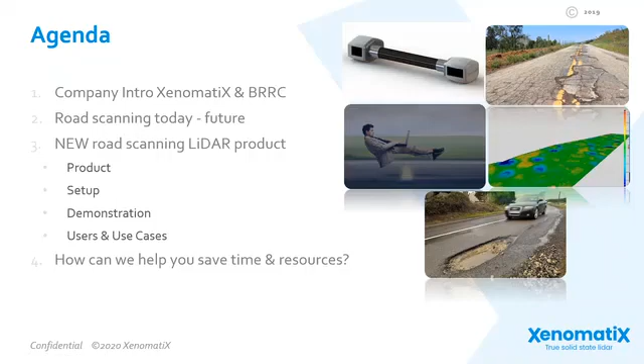On the agenda for today, we start with a short company presentation, so you know who we are. Then Tim will present a summary of the road quality measures and means that you probably all know, and he will make the link to the vision towards the future, the near future, I would say. After that, I will present the new road scanning LiDAR. I'll talk about the products. We'll set it up on a vehicle, and then all together we get in the car and we go for rides. After the demonstration, I will shortly discuss a few other cases that might interest you. And we will end with the summary, how we can help you save time and resources, because that is the final purpose. Okay, company introduction.

Start with XenomatiX. XenomatiX is a company focusing on the development and commercialization of LiDAR sensors. And LiDAR, for those who do not know, LiDAR stands for light detection and ranging, so measuring the geometry of the environment by sending out invisible light and capturing the reflected photons, the reflected light.

XenomatiX was founded in 2013, so kind of a startup scale-up, based on the invention of a professor from the University of Antwerp. He had a great idea on how to solve the requests from the automotive market.

Let me explain. When we look on this time scale, everybody remembers the outcome of the Google car with the spinning LiDAR as a mushroom on the roof. That mushroom, as I call it, contained cameras and LiDARs to measure the full environment around the Google car. And everybody was excited, not in the least the automotive industry. Then it got their attention.

LiDAR technology was known, but the usage of LiDAR technology gave a perspective to them to realize safe and reliable autonomous driving. But to make this happen, the car industry asked to make that mushroom, that big thing on the roof, more robust and reliable. And they asked for what they call a so-called solid state solution, meaning no moving parts, robust for the car.

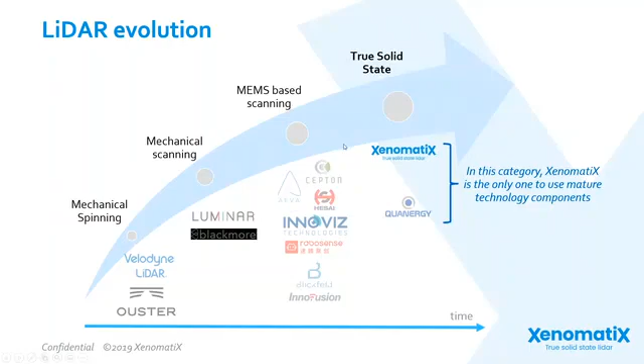Our headquarters is located in Belgium. We have offices in Germany, in the US, in Detroit, and in China. And we have also distributors. In the US, they're located in California, in Japan, and in South Korea.

Tim, can I ask you to shortly present the Belgian Road Research Center?

Thank you, Chris, for the introduction. Yes, of course. My name is Tim Massard. I'm a researcher at the Belgian Road Research Center. We are an impartial research center since 1952. We have different divisions, going from geotechnics to pavements and to road management. I am working in the division Road and Asset Management. Our key activities are research and development, technical assistance, and knowledge sharing, and this for all stakeholders in the road sector.

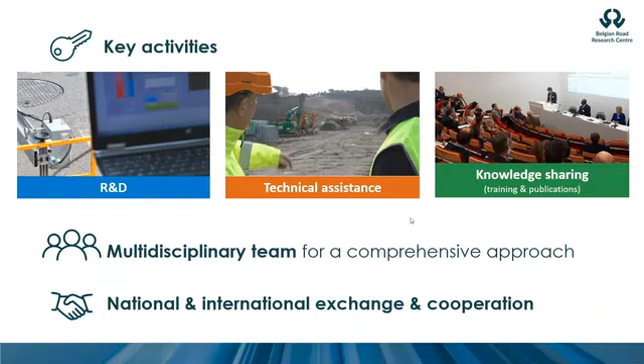Let me now summarize the measures and means for road scanning that we all know, and then pass the bridge to our vision for road scanning in the future.

We can observe different road network owners. One of them are national road authorities, also known as NRAs. These entities have a quite big road network to manage. Therefore, they are using different technologies to measure fast several technical parameters like longitudinal evenness.

For this parameter, different indicators are used. IRI is the best known, and software like ProVAL is broadly used. Other parameters are transversal evenness, crack detection, skid resistance, etc.

For this demo, we chose to drive around in Brussels because that's nearby where BRRC and we are located, and because we use these measurements for research we do together with the Belgian Road Research Center.

So here, okay, software ready to go. You remember the bands of lasers. We stand still, let me explain one more time. On the left side you see the laser bundles. As long as we stand still, it's always the same part of the road that is measured. It's only when we move that we construct the full road and fill the gaps.

Important to understand is the color code you see here. Green means it's the height value of a flat surface underneath the car. Blue means it's below that flat surface, so there's a pothole or a gap. Yellow and red means it's above, so a bump or speed breaker, with a different scale that we can change. This is the 3D data, and on the right you see the camera.

One more thing, in the software we can present the digital data in two directions. Here we'll start with showing it while the car is driving backwards, I would say. So with the camera image processing this way, the LiDAR or geometrical data will process in the same direction. During the demo I will make some cross sections, and that is always referred to the position of the driver, so I will turn this image around, but you will see, no worries.

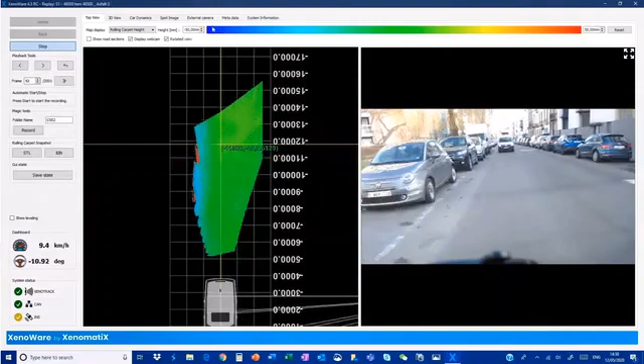So you have the bands, we have the camera image aligned, and we start driving. You see the different bands moving with the car, so we're constructing, the gaps are filled, and we're constructing the full digital roads. You see the different color codes already, you see the scale on top. There we go from asphalt to cobblestone, and already on the left side we have some elevation, kind of speed bump.

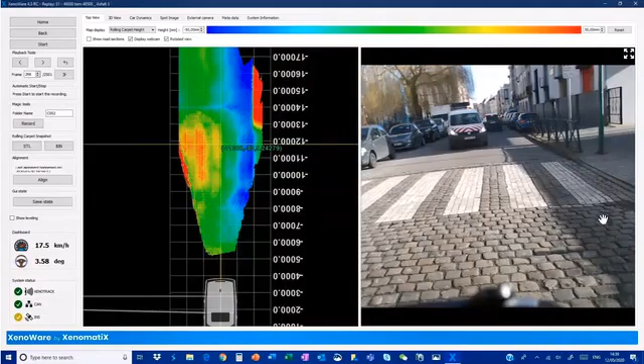And on the right side we have some subsidence, so there we have the blue color. Clearly there is some damage or modification on the road. Besides the geometry, we show the intensity here, and here the stripes are reflecting more than the cobblestone or asphalt. Just after the speed bump, there's again a subsidence.

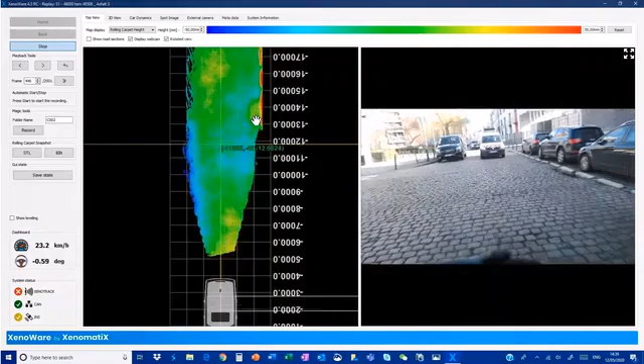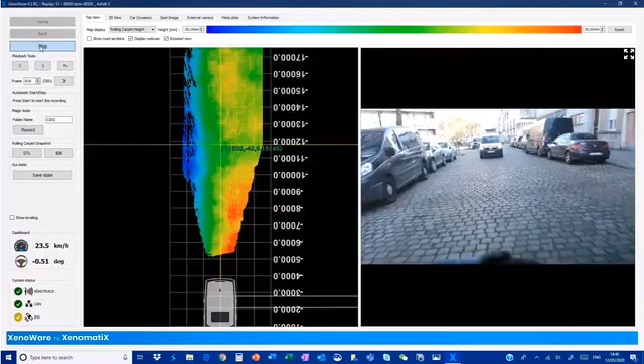We see detail, we see the blocks from the parking cars that separate the parking cars from the roads. We see blue, yellow, red, depending on the scale we use, but you see even the detail of the cobblestone itself, the shape or dimension of the cobblestone. That kind of detail we get with the LiDAR.

On the side you see the blue. Here, that's an interesting point, we have some manholes, and you see they don't fit completely with the road. The cobblestones around are a little higher on that side than this.

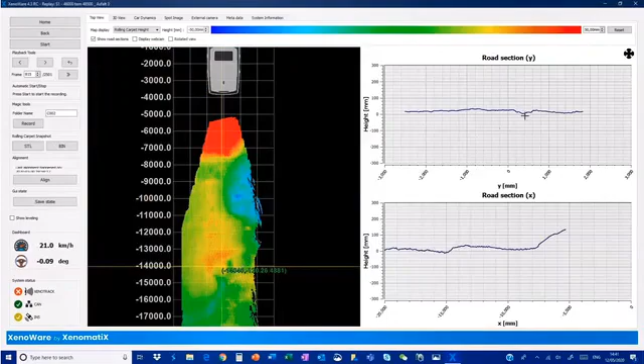So let's take a cross section. Cross section, left side on the car, left side it's flat. On the right side on the car, there's subsidence indeed, now in the position as we show it during the demo.

So every color is only visualization. There's another subsidence. The color code is visualization, but behind it are numerical values that can be treated.

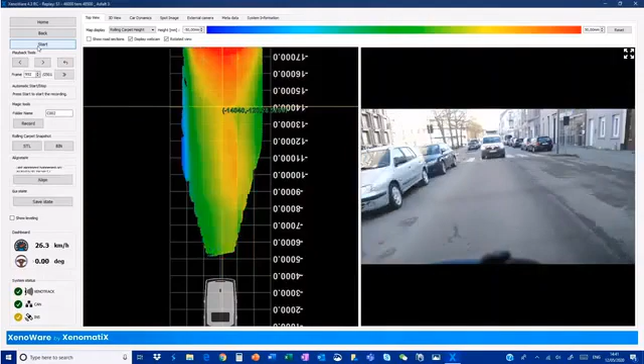We almost missed a gap here. We have a defect on the joints on the two asphalt layers. Let me zoom in with the scale and take a cross section. And here indeed, on the left back side of the car, there is some damage in the asphalt, in the road.

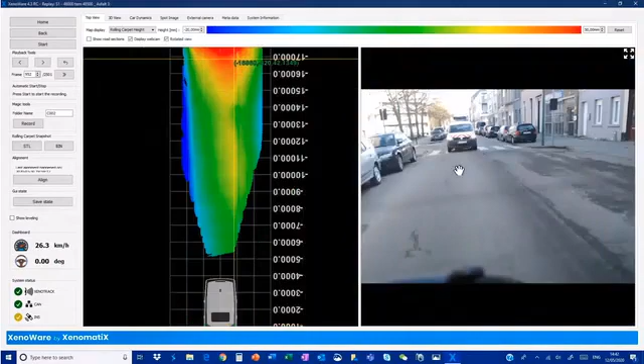And with the blue color because it's a hole. I'll keep this scale, so on the side you see the blue. Here again we see some damage on the joint of the asphalt. We see it in color, and again, the computer will see that in numerical values.

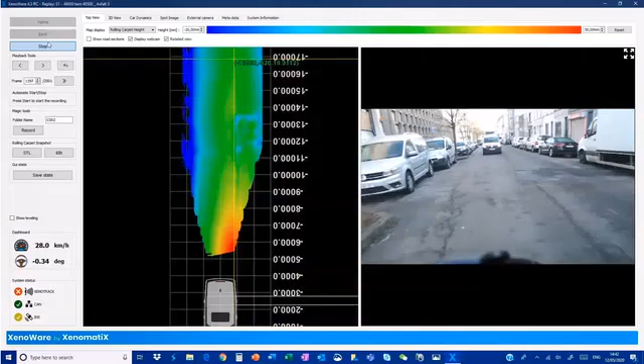While we drive around, sometimes you see the wet road, and when it's blue, then there is some geometrical difference. Here we have some serious damage, I would say, or bad repair, where the asphalt is not well repaired.

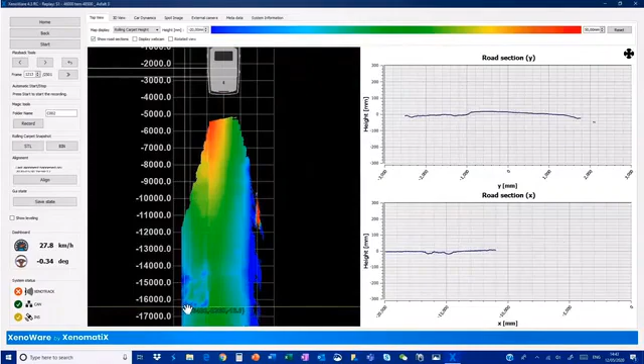Let's take a measure to have numerical values. And indeed, on the left side of the driver's side, behind, we have subsidence of the asphalt, and not just a bit. We can also show it in intensity. Algorithms will use both intensity and geometrical data to detect what kind of damage it can be, and then calculate the depth of the pothole or the damage.

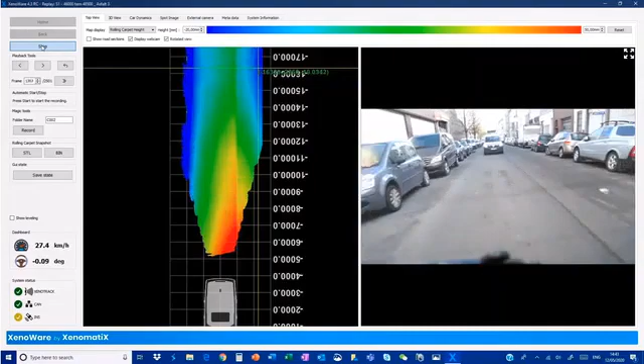If you watch clearly on the left side of the car, right side on your screen, you see the joint of the asphalt sometimes becoming blue. That means that there is indeed a hole, or there is some depth in between the two combinations of the asphalt layers.

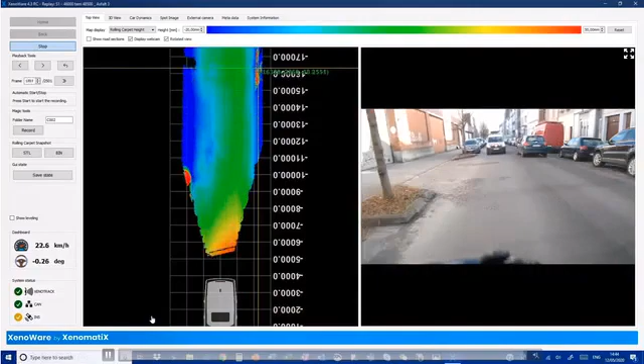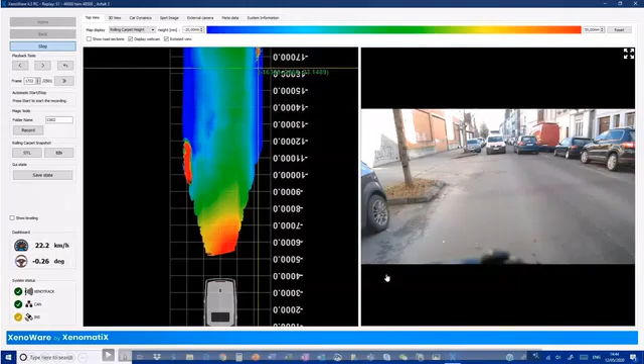Now before finishing, let's see if we see some minor... Here we see some minor degradation of the roads starting up. So you're showing the intensity, you're not always sure, is it wet or is it a geometrical default already? Here clearly we see it is a default. Okay. Okay, I think that's good for our rides.

Let me summarize the rides. I first want to emphasize that it's a demonstration but it's a real measurement, with the actual software and real analysis that you can do online or in post-processing. I summarize what we've seen. We drove through Brussels, for those who know Brussels, on asphalt and on the famous Belgian cobblestone pavements, of course.

We passed pedestrian crossings that were at the same time also speed breakers, looking at varying road levels and different damages. Remember the damage here that we almost missed. We can measure that damage. We see it in color code. The computer looks at it in cross sections or all the geometry of that damage and can then come up with an index or a quality evaluation.

We had a look at those manholes that were not fully in line and some subsidence of the manholes itself compared to the roads. We had extra subsidence here, kind of detail. We take cross sections on the fly or in post-processing. This is again the same part of the road where we go over the speed bump here that you see in the red color codes.

Here we have two longitudinal sections, a yellow one and a blue one. The yellow one here and the blue one both go over the speed breaker. Fine, the speed breaker height is 120 millimeters. We see there's a little issue though at the end of the speed breaker when we go back from cobblestone to asphalt. It's not a really nice joint. For bicyclists it might be hard.

Okay, let's go over a few other use cases making use of this new 6-dimensional LiDAR. 6-dimensional, I repeat: 3D in geometry, 1 dimension I call intensity, and then the 2D dimensions from the camera. Here we have an example of a car manufacturer, Ford. Ford is interested in the IRI on public roads and on their own proving grounds. They want to match the roughness on public roads with the roughness on the proving grounds to know where they have to drive to tune their damping, their suspension.

So proving grounds are very important for them. On proving grounds, the road profiles need to stay constant and therefore they need maintenance, because they want to do measurements today and compare the results of their suspension or whatever with the measurements they did a year ago. And the only thing that can change is the suspension, not the road. They want that to be constant. So a completely different application probably than most of the audience today.

I go for another challenging one. Another case is from a very innovative road construction company. And here you see the movie that is working. You see there is indeed some undulation on that highway. This road construction company actually wants to use it before, after, and even during roadworks to see the quality of the road that they have to repair, have repaired, or are repairing. And the focus for them lies on the undulation, the evenness, the qualification of that, and the quantification.

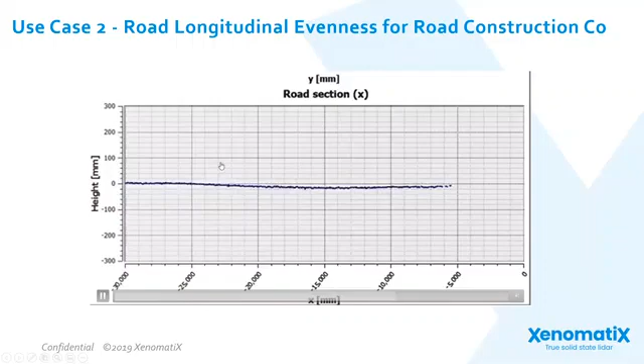Another thing, if we talk about roads, it's in a broad sense. So road means also airport runways or harbor quays or even off-road tracks. So many, and always the same information that you get in very much detail to be analyzed.

There are two more use cases. Tim, you know a little more about those use cases. Can you maybe comment on those? Sure, Chris.

Instead of using ProVAL software to calculate the IRI, we have used the Belgian technical parameter to evaluate the evenness. With this test, we could conclude that the measured road data from the XenomatiX coincide with that from other certified equipment, and that the XenomatiX achieves the level of a Class 1 profiler.

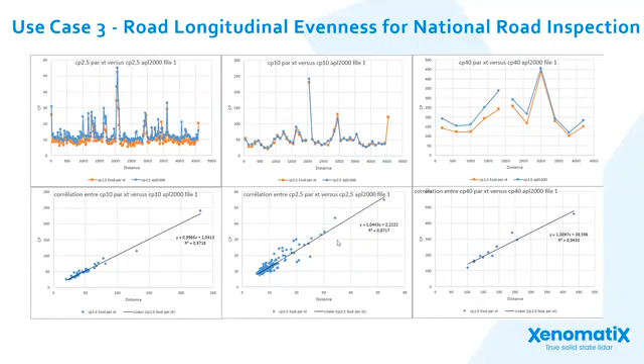Thank you, Tim. So what you see here is the correlation that Tim was referring to, between the APL as a certified profiler and the XenomatiX measurements. So now the question and the vision we want to present today: what to do with all this digital data. We want to go from data to information.

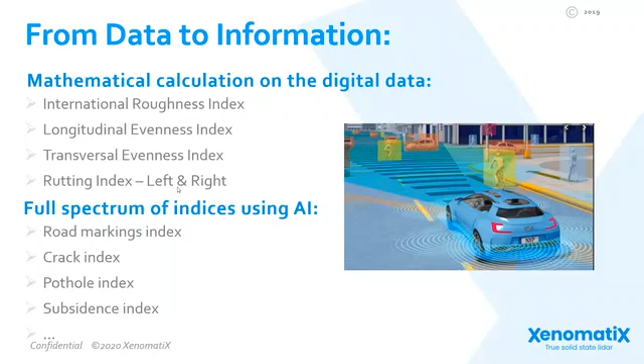With just mathematical calculation, we can obtain the traditional measures like IRI or the longitudinal and transversal evenness index, rutting index, and so on. But by applying artificial intelligence, we can come up with road marking indices or crack indices, which already exist, but we want to do that automatically based on the numerical values gotten from this LiDAR. So this is really the future where we're going.

To summarize the characteristics of this new road LiDAR: in comparison, it's proven to match a Class 1 profiler. It generates an abundance of data with 6 dimensions in total, including the GPS annotation, so there's a lot of information you can use. It's flexible to mount on any vehicle, and it's affordable compared to other equipment. It can be used for any road, in different weather, and at variable speeds. And with artificial intelligence, we can go from geometrical and intensity data to information in indices.

And not to forget, this kind of LiDAR will be integrated in the car you and I will be driving in the future. So in the future, no special vehicle, no extra equipment, no extra resources will be required to collect that data for a pavement management system. The question will be, of course, who owns that data? We can discuss that later.

So to bring the Q&A to life, we're almost at the end of the presentation. Let me suggest how we can help you save time and resources starting today or tomorrow. What is XenomatiX offering? We are offering services, equipment and software, and tailored solutions. When we talk about services, this can be generic road data that we have off the shelf available. Of course, you might be interested in a specific road for which we can do customized road measurement campaigns. And for both, we can go to analysis and also customized analysis where you prefer it.

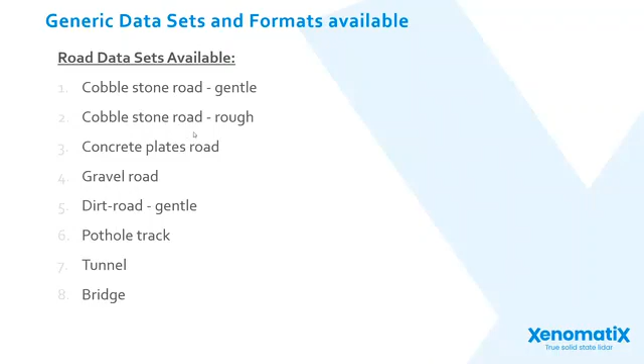To focus on the first data set, because that is available off the shelf, let me give you a quick glance of what you will find on our website after the webinar. So what we have, if you want to have a flavor and you want some data to do some testing or simulation or analysis with your tools, different road types, cobblestone, of course, we're in Belgium, gentle and rough, and I guarantee you we have both in Belgium, concrete roads, gravel roads, dirt roads, off-roads, tunnel. These are the sets that we have pre-recorded and that is available for sale in different formats.

So either you're only interested in the 3D geometry and you want it in CSV format. Maybe you want to do 2D image as well. Most people prefer it in a CRG format. That's for simulation, the mostly used. Yes or no with the camera image as part of it. You might be interested in the intensity or reflectivity data alone, in the grayscale format, as you know. Again, with or without the camera image. You might be interested only in wheel tracks, so some post-processing already done or cross-section taken, I would say. Again, available in CSV format, or you want the whole thing and the whole package. These are the standard packages, data sets that we pre-recorded and that anybody can ask for.

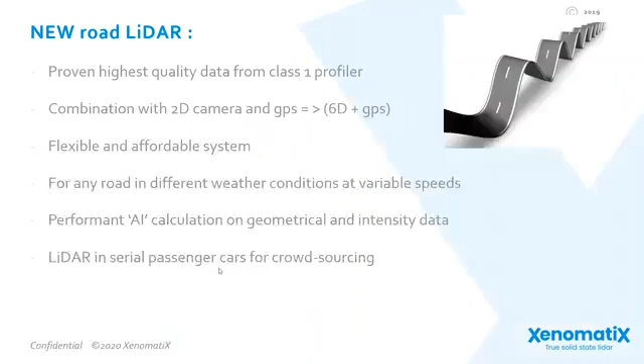The road LiDAR, as we said, can be mounted on any car. And we see in the future that a lot of data can be collected without specific vehicles, without specific resources. And that can be in the next stages, we think, by utility services like garbage trucks. The garbage truck gets the road LiDAR. It does part of the community. Then the next week, the LiDAR is mounted on another garbage truck that is measuring the other part of the community, and so on. And after a month or two, the whole community is digitized.

And if you can do that regularly, then you can really see what the degradation is. And that is what we think in the further evolution of data collection and big data, and that's going to happen anyhow. All those hurdles will be taken. That data will be collected, sent from the garbage truck to the cloud and then gathered. There can be analysis on the garbage truck, or it can be offline. That's how we see that it's going to help the pavement management system. And then all that data should be managed by that system.

Yeah, thank you very much for that response. And I guess the audience member was also highlighting a bit of a discrepancy between, on the one hand, the fact that road agencies are now going to receive a near continuous stream of data on the state of their assets, whereas the budget allocation cycles to manage or repair any of the issues identified through these scanning processes tend to take a lot longer. It might be 6-month, 1-year, in some cases 2-year cycles. It'll be interesting to see how road agencies reorganize themselves to make the best possible use of this stream of data and allocate repair budgets accordingly. I don't know if you have additional follow-up insights into that particular problem.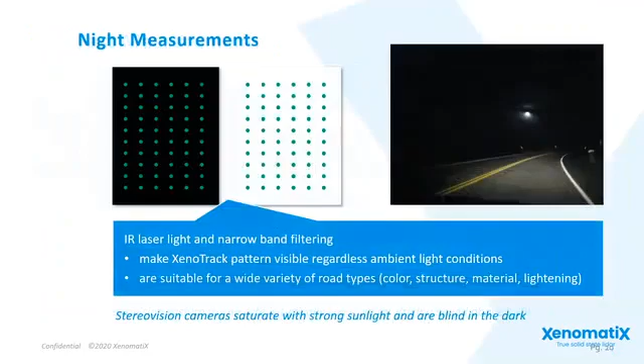I'll move on because we actually have quite a number of questions coming in, in particular to potential limitations of the system. You mentioned that the LiDAR does operate under rainy conditions, and we wanted to know if this was true all the way down to downpour and very heavy rain. And the impact of nearby traffic on readings, in particular if there are nearby cars trailing the survey vehicle: will the signal bounce back, and how will the reading be made? I have a couple more questions on prospective limitations, but perhaps you could start with these two.

Yeah, sure. So rain again is a very good question. You can imagine that all the LiDARs we are working on to implement in serial cars for different levels of autonomy are for safety, so they don't stop functioning at night, nor when it's raining or snowing or foggy. That's why we have chosen a very specific wavelength that travels through water. I'm not talking about meters of water, but it goes through, and we even capture the reflections. The same reasoning counts for fog, because fog is also a kind of water. So we have a LiDAR that can measure in those conditions, which is needed for autonomous driving, and that's the same technology we can apply for the road scanner.

About the question on nearby traffic, the algorithm will filter out cars on the side, as you saw during the demo. It's not going to measure the cars. But if a car is approaching the measuring car too closely, really driving in the field where you're measuring, then of course you won't have those measurements. That is one of the reasons for the rear view in these kinds of applications. You see here that we can measure very close by. The system also allows us to shut off a few bands. If we see the cars are always here, then either the algorithm filters out this data and does not account for them, or we just shut off those bands.

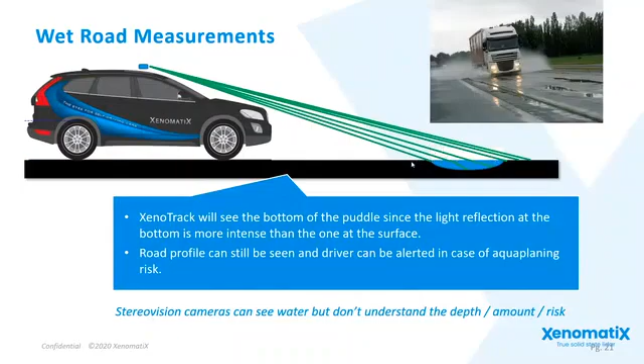And don't forget that this is static. If the car is moving, those beams scan the road, and as you saw in the presentation, the little gaps that are not centimeters wide are detected. That's partially because we are scanning while the car is moving, rolling, and pitching.

I hope that answers the question, Brendan. Hello, Brendan? Sorry, my apologies, I was muted. Yes, I believe it does.

Okay, a couple of questions now regarding how this data correlates with other measurements. So have you tried calibrating the IRI against, for instance, a walking profiler or other ways of collecting pavement roughness indicators?

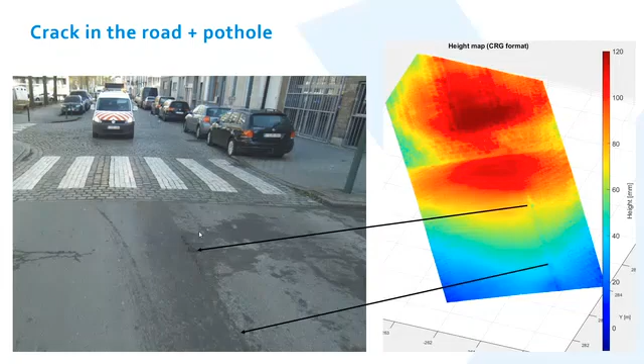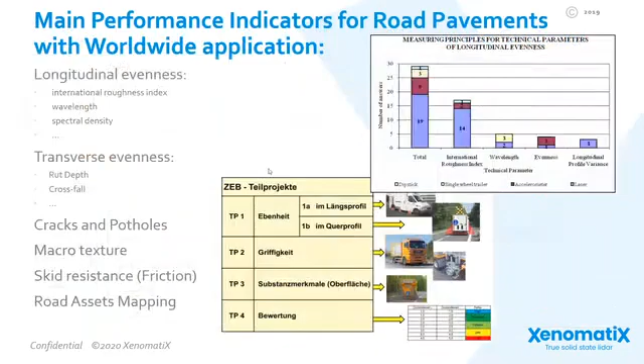What we've done so far, and that's actually the specialist contribution of BRRC, is what Tim has presented in the extra use cases. We've compared to data, and we are still comparing to data, with an APL, a profilometer, and a multifunctional vehicle. These are the standard known class 1 profilers with which we have been comparing. I have no knowledge of other comparisons. Maybe Tim, did you do other comparisons as well?

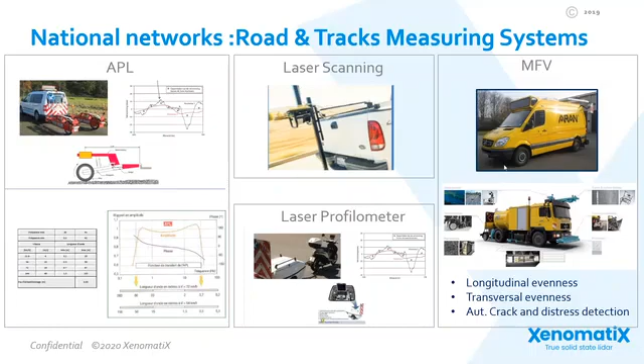No, we looked firstly at the raw data coming from our APL, or laser profilometer, and we compared it with the raw data from the XenomatiX. So that was the first step, and then we tried to calculate our evenness indicator, the evenness coefficient, and we saw a very good correlation between the data coming from XenomatiX and the data coming from our APL or profilometer. So this is what we have done so far.

We are looking at the ProVAL software to compare as well the IRI, but our data is coming from APL. We are also involved in a project in Brussels, where we have data from a multifunctional vehicle. We know the comparison between our APL and a multifunctional vehicle, so we have an idea what the correlation will be between the XenomatiX and this multifunctional vehicle. But with the walking profiler, we didn't do it.

But as you see, what we try to do every time is go to the bottom of the raw data, meaning we try to compare the road profile, not the indices. We go one step before the indices are calculated. And you can imagine if the profile looks exactly the same, whatever indices you get out of it will be the same as well. So this is the most stringent approach. And as you know, an APL is not measuring the lower frequencies, which our XenomatiX can do better, so we have to filter them out to be comparable with the APL data. Same for the multifunctional data coming from a whole load of sensors.

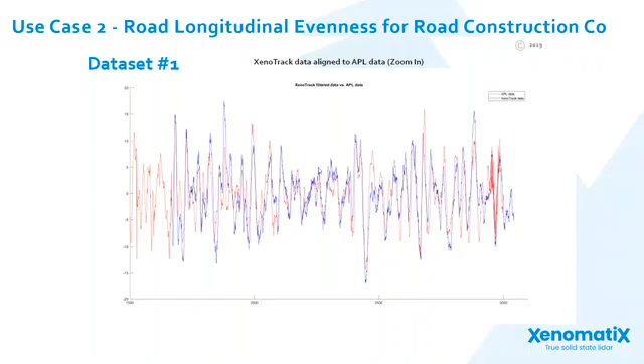Okay, let me follow up with a couple of other aspects linked to how your data correlates with other measurements. So we spoke about IRI. What about cracking, and has any work been done on automatic crack assessment and how this compares to manual crack assessment? This may be a question for BRRC in particular. And while you think about that, another question this time linked to your measurements of marking intensity. First of all, how do you measure it? Is it measured in millicandela, for instance, and does it correlate with the type of 30-meter geometry testing which is currently conducted?

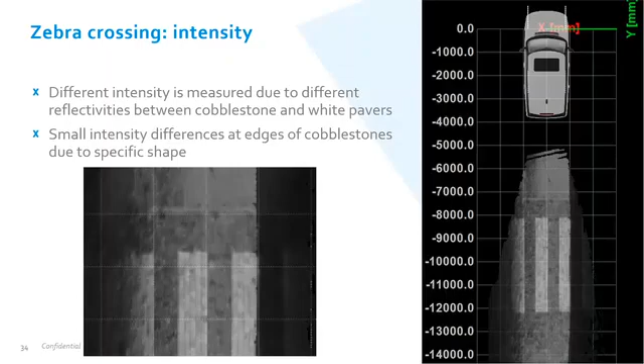Tim, are you taking this one? The first one with the cracking.

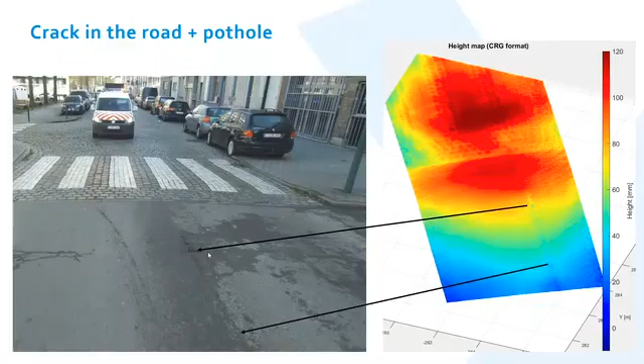Yes. So what we are doing at this moment in Brussels is a visual inspection based on a methodology. This is labor intensive, as I said. We compare this with the multifunctional vehicle that has a system for automated crack detection, and then we compare this with the 3D data, if you want. So we look at the LiDAR image, we look at the picture, and we also look at the intensity picture to try to recognize cracking and other defects in the road.

Until now, we don't have an automatic algorithm to detect this, but we are working on it. What we try to do as LiDAR specialists is get the most data out of the 3D geometry of the point cloud from a LiDAR, and then use the additional dimensional information to train algorithms and come up with the same indices. When you talk about cracks, it's not only the raw data you compare, we also need the algorithm to come up with crack indices and compare those.

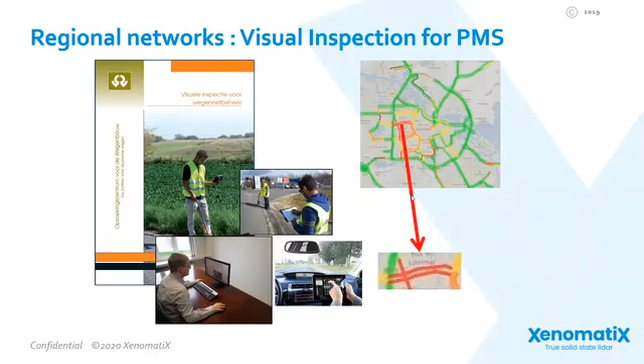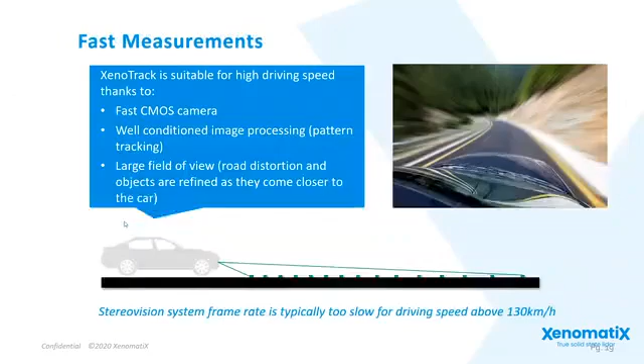Okay, and what about pavement markings? Have you tried correlating your readings with other specialized forms of measurement, the road markings? Yes, absolutely. Whatever we measure in intensity is in the same frame as the geometry, so we know exactly where that road marking is positioned. What we measure is more a relative intensity, meaning we cannot give an absolute value of the reflectivity of that paint to qualify whether it's still good markings or not. How we do that is use references, because we know what we measure beyond just the painting, and we know the reflectivity of the road, which can differ in rain and snow. You don't see it in snow, but in rain this way we can rescale the data to come up with qualifiers for the painting. But that is work in progress, not done yet. The position of road markings we have, but the absolute reflectivity measurements, we're not ready yet.

Okay, so we're now going to move over to questions linked to the storage and usage of the volumes of data generated by these scanning processes. Before we do that, Tim, one of your colleagues at BRRC came up with an interesting additional use case that perhaps you had not thought of.

We may use this technology to easily control the geometry of speed bumps, their conformity to standards, and compare with another manual method we have at BRRC. I don't know if that's a potential application of LiDAR technology you had perhaps considered.

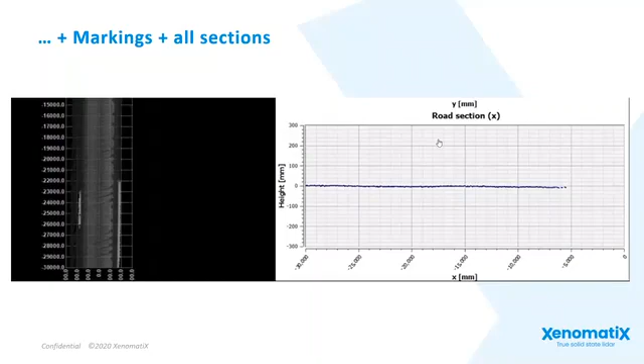About post-processing, the system comes with software with 2 licenses actually, one on the controller that is controlling the LiDAR, as I showed in the picture.

This controller stores data on an external drive if you drive miles and miles. Processing can be done with the software while you're doing the measurements. For instance, you can simulate an APL and just keep two cross-sections in the longitudinal way, only keeping that data and throwing away the rest. Of course, then maybe you don't need the full system, but it's all possible, and that's the flexibility of the system.

Most of our customers, and ourselves, we keep the data, and we can drive multiple miles and store it on the CPU. This controller is a PC with storage capacity and calculation capacity for online or offline use. And with the system comes also an offline license of the software that you put on your PC, on your desk, to do further post-processing.

The data that you've seen during the demo, that's just online, that's available - all the cross-sections that you can take while you're driving or afterwards. And then the further post-processing depends on what information you want.